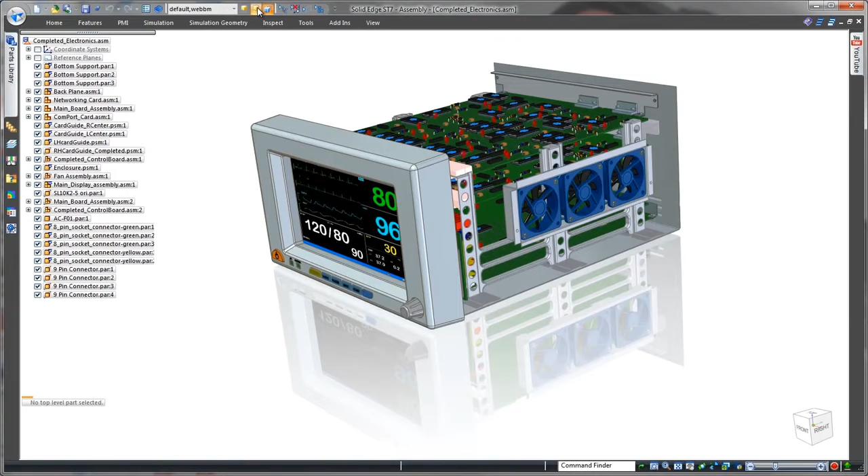We'll use Solid Edge to complete the enclosure of this heart rate monitor. Solid Edge with synchronous technology excels in sheet metal construction, allowing designers to efficiently work with surrounding components to define external product housings. In most CAD systems, the user has to modify a part independently from the overall product assembly. With Solid Edge, additional flanges can be created at the top-level assembly just by selecting and dragging the plate's thickness faces. No special command necessary.

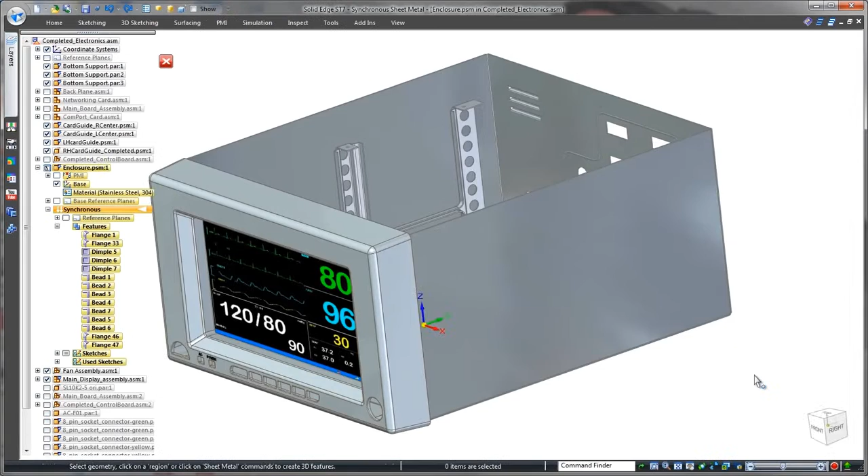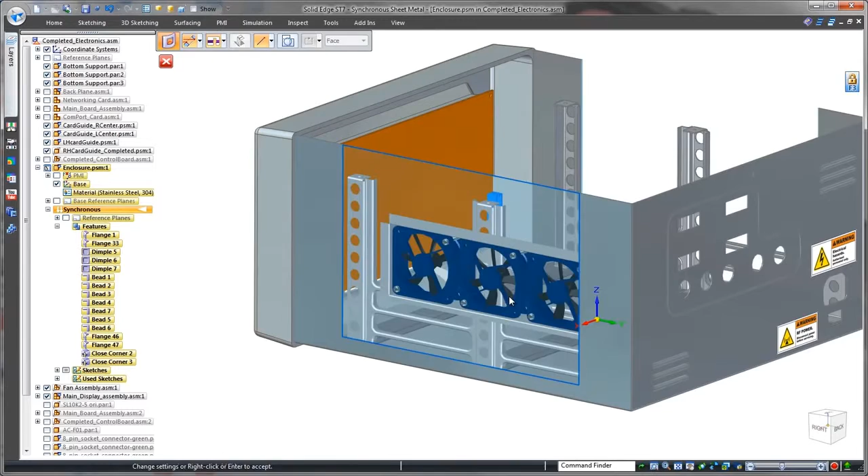Medical device manufacturers must adhere to strict government regulations, and any gaps between panels could be faulted. Using the Close Corner command, these gaps are eliminated. The internal circuitry produces a large amount of heat, so normal operation of this monitor relies on cooling fans. To provide clearance for airflow, we'll define rectangular cuts on both sides of the enclosure. Synchronous modeling provides several methods to intuitively match the size of these openings to the shape of the fan assembly. Now that was fast and easy.

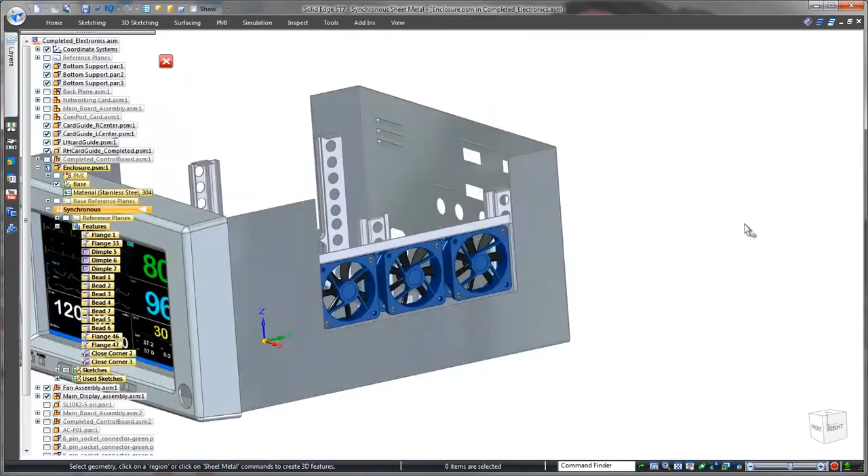Next, we need to create a locking tab for the enclosure's lid. Here we'll select the thickness face, but opt for a partial flange to create this tab. Using one of many handy options, we'll ensure its top is flush with the top of the part. We'll lock in a precise tab location using 3D dimensions. To meet safety requirements, simple rounds will remove sharp corners.

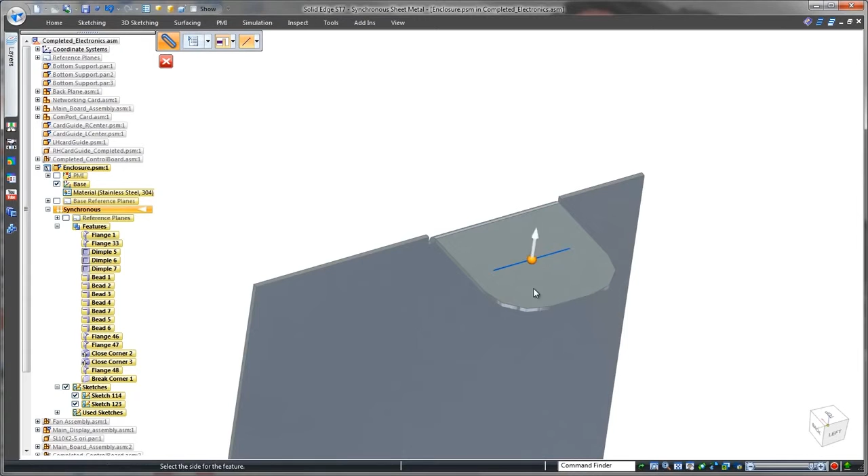The locking tab requires a starting slot, and Solid Edge needs only a sketch line to create the slot. We'll place a hole in the slot to complete the locking tab. We get the required clearance between the top of the locking tab and the lid by pushing the tab's top face deeper into the part. Another modification made easy. The locking tab needs to be stiffened, so we'll use the gusset command.

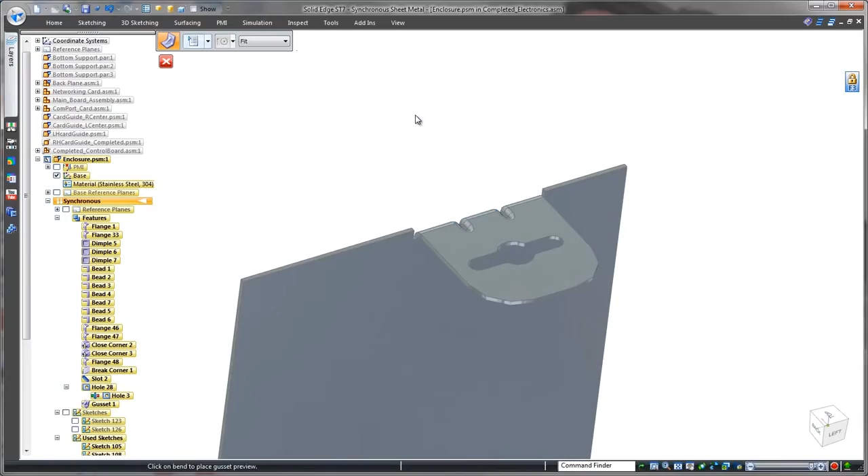Simply specify 2 gussets and Solid Edge automatically computes the spacing between them. Since an identical tab is needed to lock the lid on the opposite side, we'll quickly fence select and mirror these features to the other side. This completes the design of the enclosure's base.

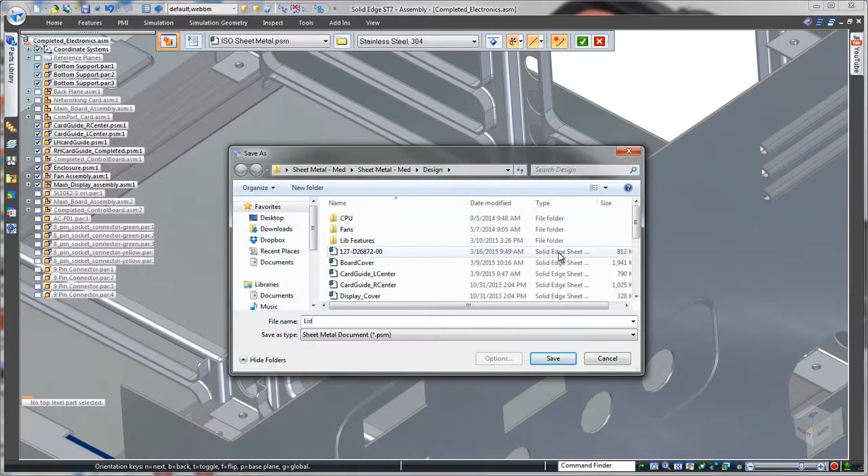Now we'll create the lid. This is where the power of Solid Edge top-down design is realized. By constructing our housing in the context of surrounding components, we can ensure all holes align and mating parts match the first time, avoiding costly rework and eliminating scrap. As before, we'll create a new flange just by dragging the lid panel's thickness face to the length we need.

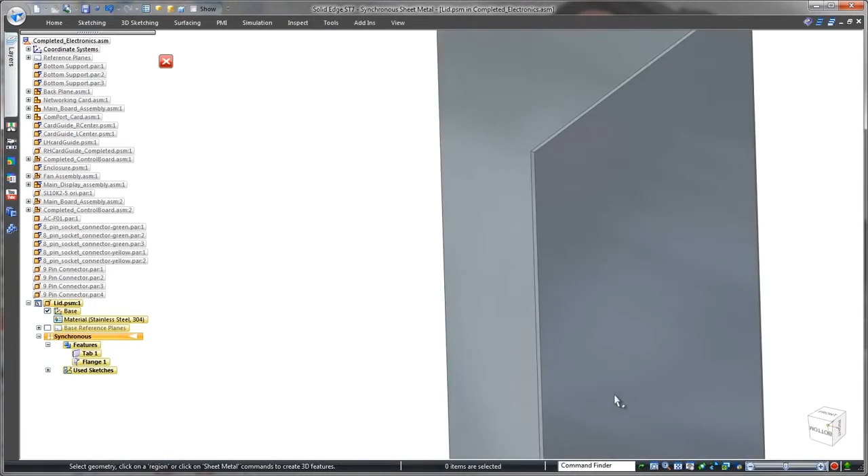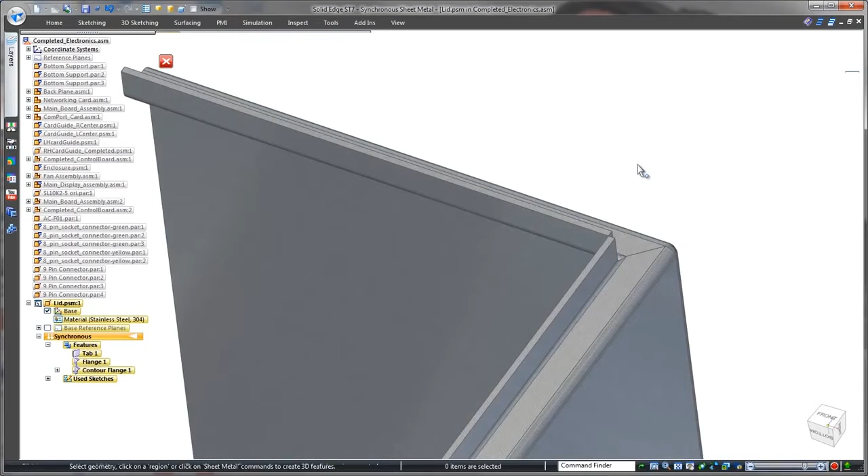On the front of the lid, we need a flange that wraps to the underside of the control panel. The Contour Flange command not only creates a more complex flange that will fit just right, it also allows us to close the inside corners too. Notice this bend radius doesn't match the rounded corner of the control panel. No need to access the history tree, just select the bend and change the radius. Again, that was easy.

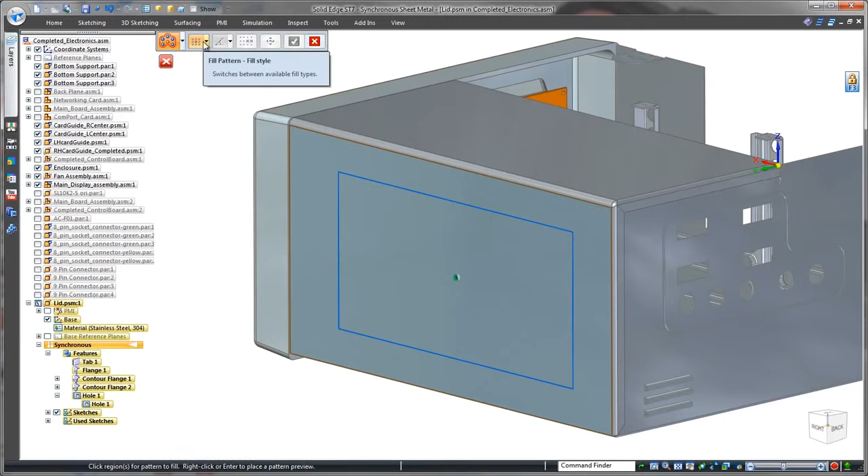Remember the fans? Proper operation will require a vent on the side of the lid. We'll create this vent by sketching a rectangle to define the vent's extent and patterning a hole using the fill option. It's as simple as that. Notice that we have an interference problem between the lid and the front of the control panel. Applying a synchronous relationship will move the vertical flange flush with the control panel's thickness face. That was an easy fix.

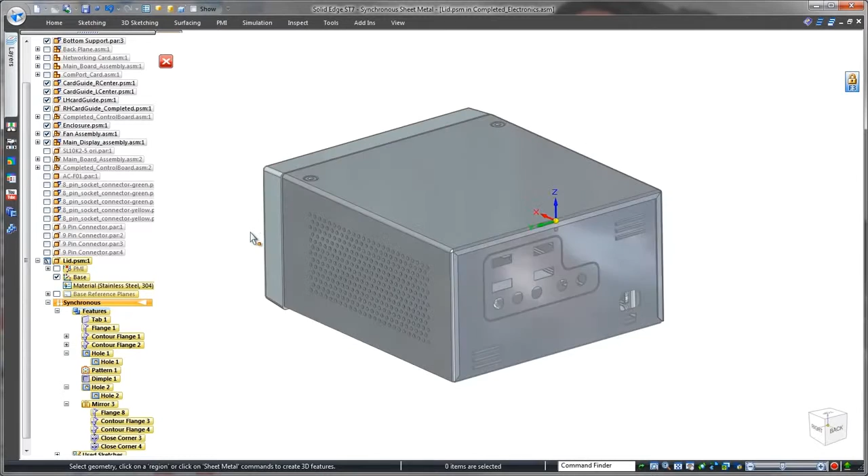We'll finish the enclosure by mirroring this lid half around the thickness face of the part. Solid Edge facilitates creation of manufacturing information, often with little user intervention. Watch as we automatically derive a bend table from the lid model. Finally, we'll generate a flat pattern for use in a downstream manufacturing drawing. In this case, we'll insert the bend table and add a few coordinate dimensions.